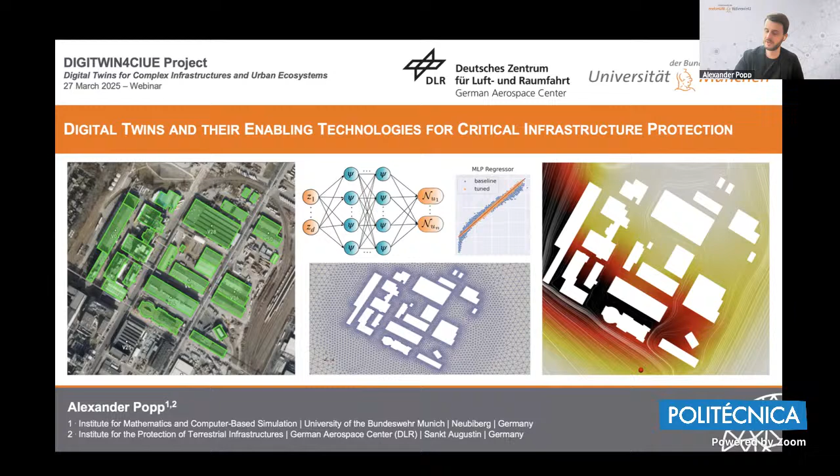Taking it from there, in recent years I built up a second focus of my research, which was revolving around digital twins. The application case that emerged from this is basically infrastructure modeling and infrastructure monitoring. So this is where our two fields of research interest basically met recently, and I'm happy to be here and talk a little bit today about our activities. I hope you will find this interesting.

Since I'm maybe new to most of you, I'm going to do a very quick introduction beyond what has just been said. So who are we and who do I represent? On one side, as part of the university, we've built up in recent years a research project called RISK.twin. You can already see from this acronym that RISK refers to risk associated with the treatment of infrastructures, and twin refers to the digital twin as the central research theme we've chosen.

So the deal basically is that we do the fundamental research within our groups at the university. We have expertise there in the civil engineering department for several sectors of infrastructure, right? Transport infrastructure, but then also in the building industry and everything related to the energy sector, water sector - all the classical sectors of critical infrastructure with the domain knowledge. And then we have these integrative parts such as simulation, model order reduction, scientific machine learning that try to condense this domain knowledge into tools useful in engineering practice.

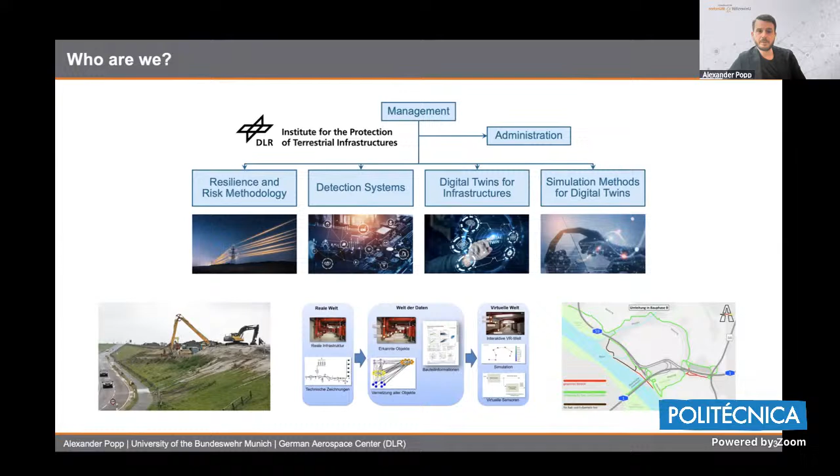Now let's start more with the topic of the talk. Probably to this audience, I don't have to motivate too much that critical infrastructures are omnipresent and that their protection is of utmost importance for stable operation of all the critical services in society, and basically all the way to national and European security.

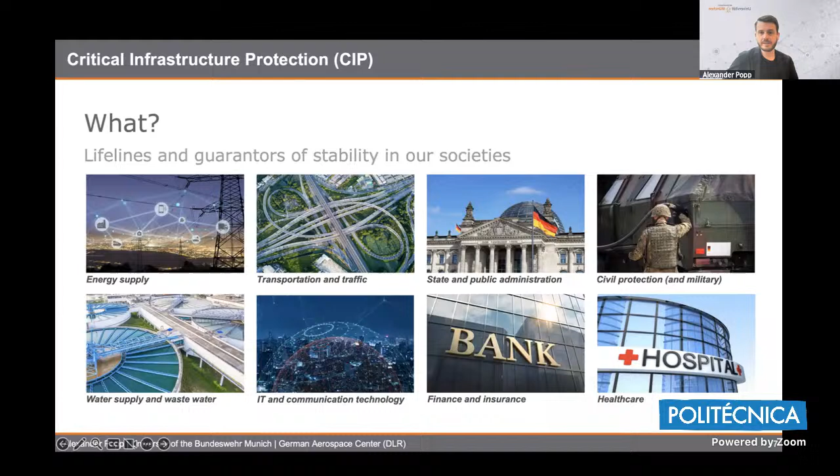The natural question that arises if we talk about protection of infrastructure is: protection against what? The answer to this question is extremely broad, showcasing the complexity and diversity of this research field.

At the end of the day, and this is a common misconception, if you want to protect a certain infrastructure - let's think about a nuclear power plant somewhere in France - there won't be one magic digital twin model in someone's computer that you just run and that will automatically safeguard and give you information about all possible scenarios and threats.

Because the threats are just so diverse, I advocate that we first do a threat and risk analysis, analyzing what types of dangers and threats we want to focus on. Then we need to develop and modularize problem-specific monitoring tools, a problem-specific digital twin that can answer relevant questions in that field.

A classical threat scenario that's sometimes forgotten these days, which I showed with the bridge collapsing in Dresden, is technical failure and lifetime issues. I think this is by far the largest and most important issue among all the threats and dangers posed to our critical infrastructure.

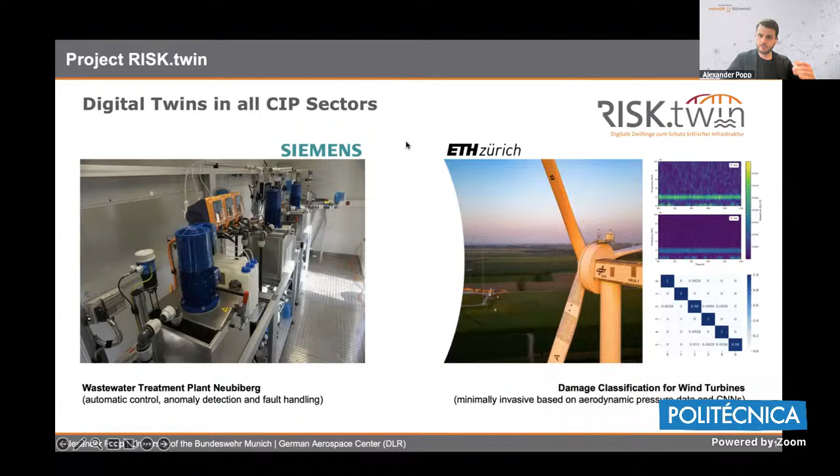So what we do is work with people from ETH Zurich—they also have a spin-off company—where they developed basically a sock or sleeve that you pull over parts of the wind turbine blade that does aerodynamic pressure measurement. We don't measure anything for the structural mechanics; we only measure the aerodynamic pressure distribution around the airfoil, around the profile of the blade. Then we apply machine learning techniques to do damage classification based on the aerodynamic pressure measurement. We've shown in a preliminary study, published recently, that you can get information on potential structural damage—cracks that happen, for example, close to the root of the blade—solely based on those aerodynamic pressure measurements, which would be very nice if we can translate this into practice.

All right, so some more theoretical words on what a digital twin is for us and how we deal with this. I know this is really dangerous—going into the discussion of what is a digital twin can lead to hours and hours of discussion. I'm happy that we don't have direct feedback right now, but you can ask me later about it. So I don't want to go into the full discussion. I'm just going to show a minimal definition that I think we can all hopefully agree on.

For me, a digital twin is a platform of models that consists of a physical asset—so we have the real infrastructure—its digital counterpart, whatever that might be, with some bidirectional coupling. So we have the real infrastructure, we have some digital model or digital representation, which can also just be a data model, and we have coupling between those two.

And this coupling needs to be bidirectional. So I think this qualifies as a digital twin. There's also recently been in the US this National Academies report led by Karen Willcox and others, so I think it's very close to a minimal definition of this.

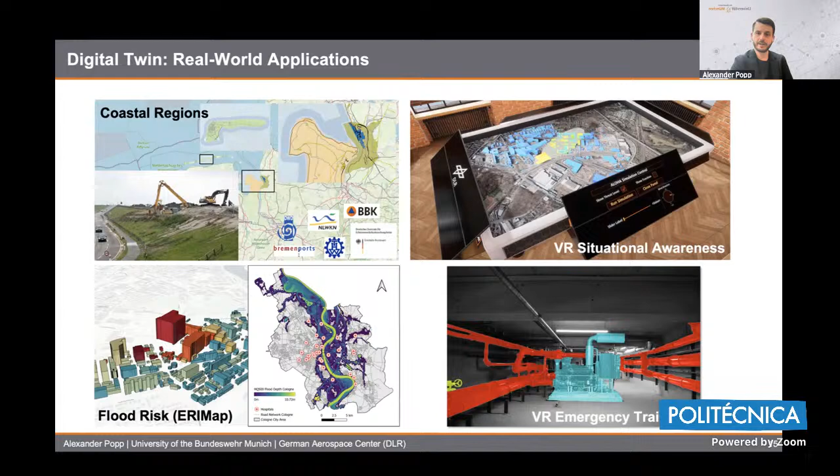On the lower right, you can see something like a virtual reality environment - in this case, for training of emergency services, emergency fighters. An obvious problem is that firefighters, for good reasons, cannot practice their critical crisis scenarios too often, because luckily there's not a fire very regularly, or not something going on very regularly. So one field of research we are going into is setting up VR environments for training of emergency services, where they can do some virtual training. The picture on the top right I will show later on.

I'm going to mention this very quickly and focus on the second use case - one use case we are dealing with quite a lot, but that goes really deep into civil engineering, so maybe it's a bit too specialized for you - is bridge monitoring. I just want to show some highlights from our projects there.

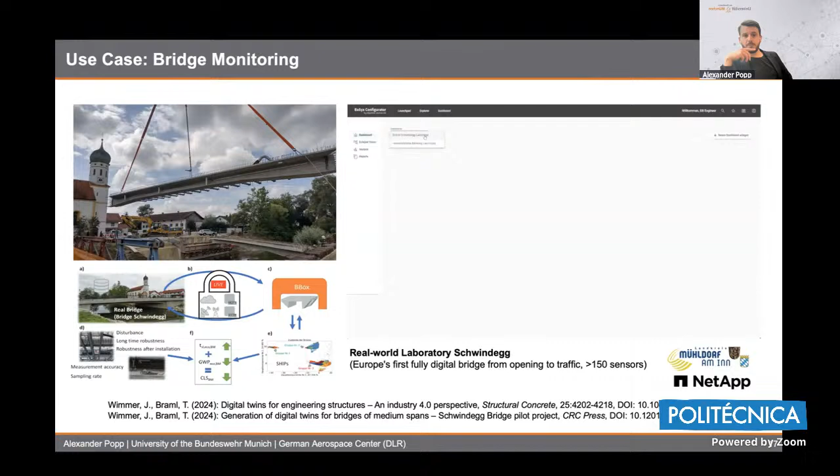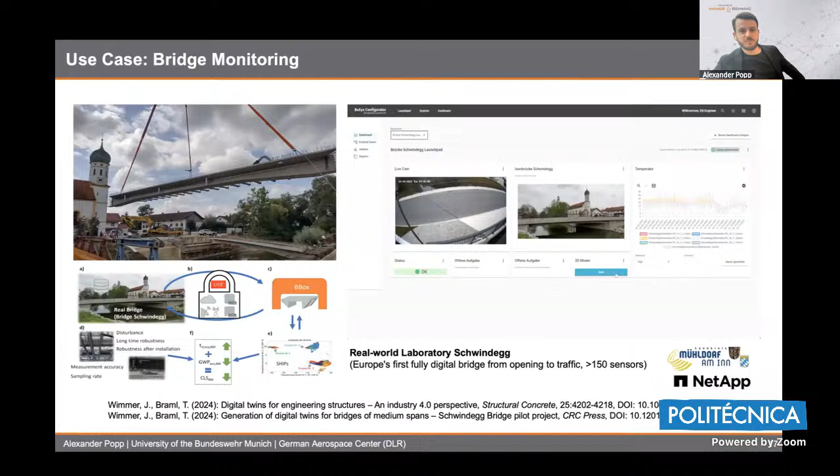From this RISK.twin project, we were very lucky and very happy that we could actually build up what we call a real world laboratory. So what is a real world laboratory? You can see on the top left - this is a really nice, typical small village in the south of Germany. Due to some personal connections, we were able to partner with them.

They built a new bridge on the main road going through that village, which is not too far from Munich. And we partnered up with them, and we could integrate everything we could ever wish for having a full-scale infrastructure monitoring. So basically, we installed this bridge with over 150 sensor systems, including really state-of-the-art fiber optical sensors that go along the reinforcement bars.

So now, since a bit more than one year, when this bridge was opened, we have a flow of real-time data coming into our servers, and we can use this, as I said earlier on, as a real life use case for developing our methods.

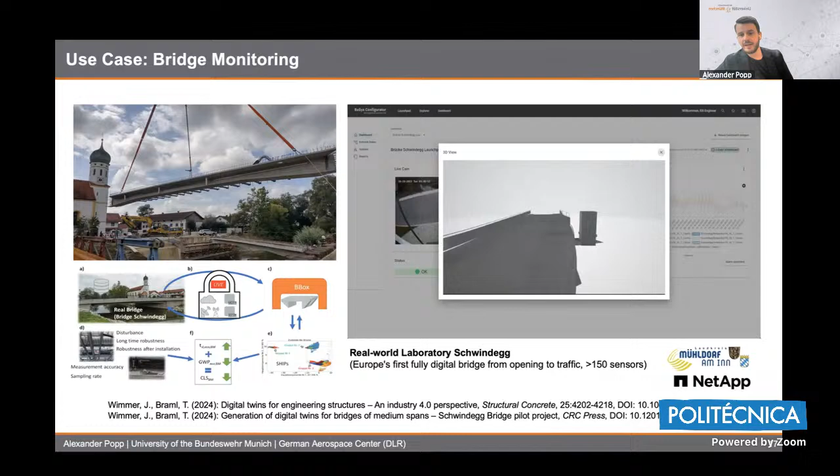And we are quite proud about this because you always have to be careful if you say you're the first in doing something, but we double checked. So this is, at least in Europe, the first fully digital bridge right from the opening to traffic. Meaning that it's a new bridge, and from day one we have all the data, which is very critical and important, right? Because often you have bridges that have already been around for some time, but here, right from the construction phase, we have all the data that we need. So this is also now for us some kind of test bed for developing further our methods.

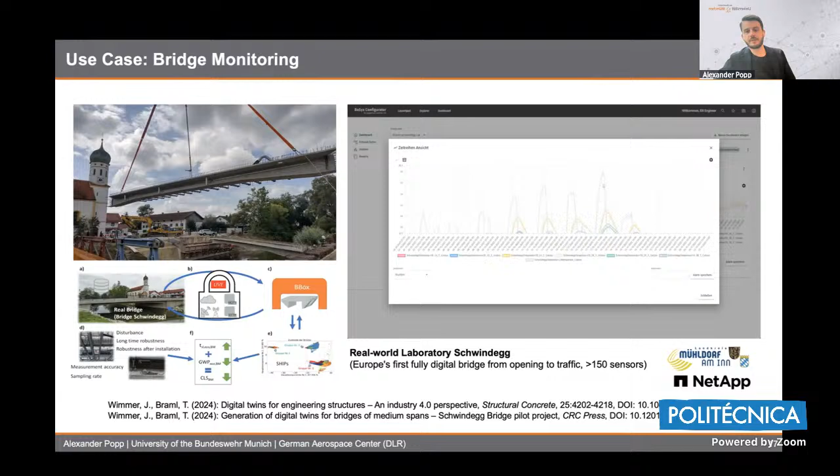Okay, and this is all connected to this, so I'm just going to jump over this. And I'm going to use the remaining time to focus on one use case that maybe is not the most obvious use case if we talk about critical infrastructure, but it's related to that. And I like that use case very much, actually, because it showcases very nicely what we can do with digital twins. And it has turned out to be very relevant, and we have many partners already for parts of this research, both on the emergency service level, but also on the critical infrastructure operator level.

So the use case is a chemical accident. We came up with that use case basically with an industry partner that we have: a large German company, Henkel. I don't know how well known this is outside of Germany, but it's one of the largest chemical companies in Germany, and they operate one of the largest industrial facilities, where they produce chemical base substances, very close to the city of Düsseldorf. Düsseldorf is a major city in Germany with around 500,000 or 600,000 inhabitants, and this company has been around for a while.

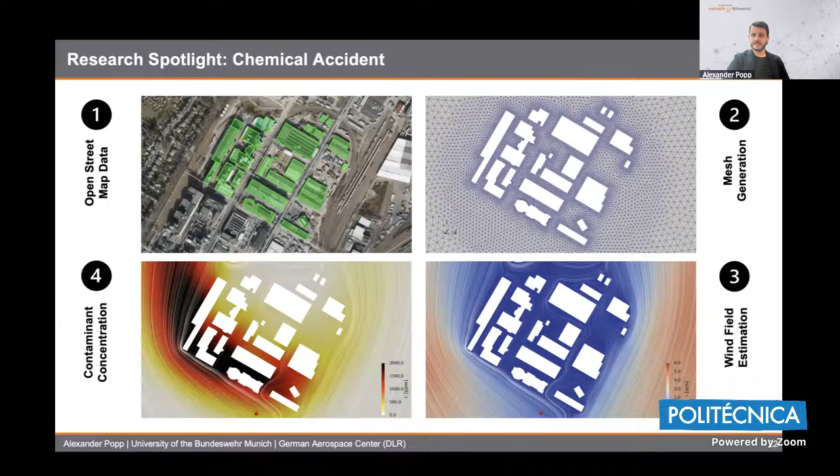So anyway, in short, the company and of course we from a research perspective are interested in what's going to happen in the case of a chemical accident. The problem that you have—here you can see just some snapshot images—is that you don't know. So how will you actually learn about this chemical accident? Well, you will have some sensor systems deployed somewhere on your ground, somewhere along this big chemical plant, which stretches over more than a square kilometer in this case. And so the question really is: at some point, some sensor will be triggered and tell you there's some hazardous gas flying around in a certain concentration. So you don't even know in the first place where the gas has been coming from.

In terms of doing simulations or what a digital twin can tell you, you're interested in what we call a forward problem in mechanics. Where is the hazardous substance transported? That's what we want to know, and we want to know this fast, because this might be very important to tell people to evacuate, because they shouldn't stay there.

But the problem is that typically we don't even know, or we cannot model this forward problem appropriately, because for this, you would need to know the initial conditions. You would need to know where did this hazardous substance come from, where did it start and when, and then we can do a forward simulation.

Instead, what we have to focus on in these cases is that we have to solve so-called inverse problems. If you're in mathematical modeling, you know about inverse problems. First of all, we need to identify where is the source - we have to do source identification. Where has the substance actually emerged from?

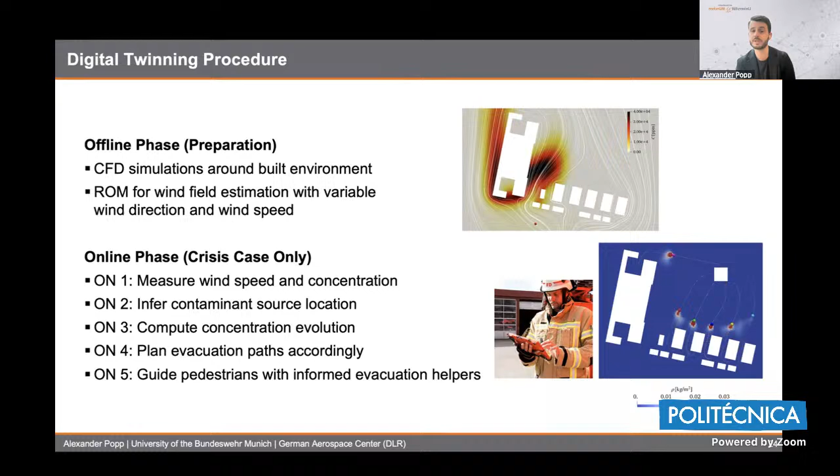We go step by step through this process. First we compute where the source location actually is. Then with this reduced order model we can compute the forward problem, where this gas is transported. We can plan evacuation routes, and as shown with this firefighter scenario on the iPad, we can forward this information to emergency services to guide people towards safe areas. This must also be done for 3D problems with complex built environments, and for city scale simulation this becomes very computationally heavy. So the offline phase needs to be planned very well, which I won't address too much today.

Sorry to cut you, Alexander, it's already getting late. If you could accelerate a little, that would help, so we still have time for questions. Almost done, almost done.

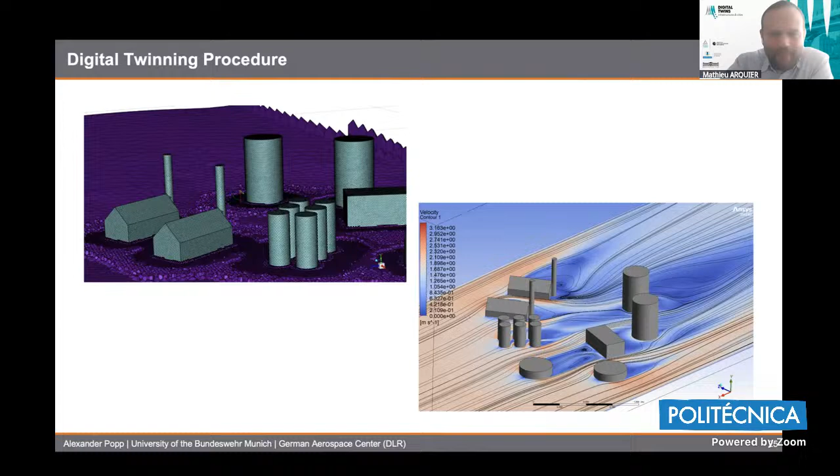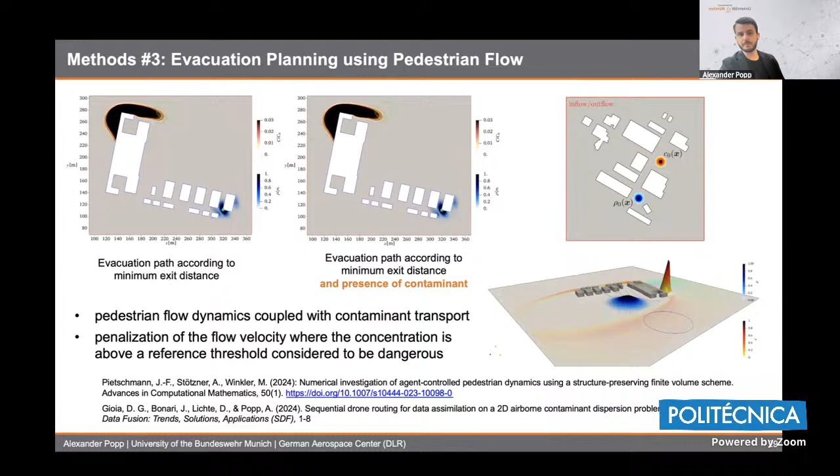Also for the forward problem simulation, I'll skip this. This last thing I'll show demonstrates how we integrate all of this into technology at the end of the day. We call this a situational awareness table, a virtual reality application that we invented.

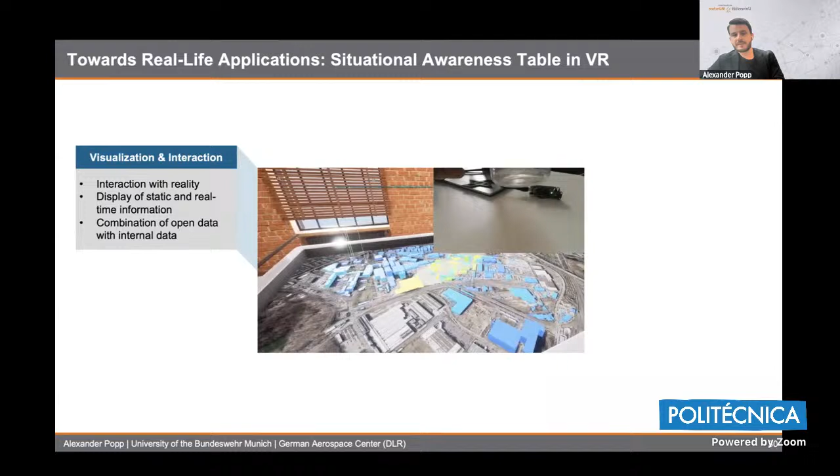In this virtual reality environment you can see the built environment, in this case a chemical plant. Here you can really do everything I talked about, the forward simulations and inverse problems, in a crisis scenario in real time on this VR table.

Why VR? Because often crisis teams cannot be assembled fast enough, since these people are sitting in their offices, so they need to meet online in a virtual room as the fastest possible way. They can have an online crisis meeting, run some what-if scenarios, and check where to deploy firefighters, where to evacuate, making those decisions in real time assisted by those digital twins.

So, sorry for taking a bit too much of your time, but I hope I gave an overview of what we're trying to do here. I'd be very happy to continue these discussions with whoever is interested, and thank you very much for your attention, happy to interact more.

Thank you, thanks a lot, sorry again to rush you, Alexander. Just a quick question, can you provide us the PowerPoint? Yes, I can, I will have a quick check, and I might have to remove 2 or 3 images for confidentiality reasons, but apart from that it's going to be just fine.

Yes, thank you, sure. If anyone has any question, please either unmute yourself or type in the chat. So is there any question? Maybe I will start with the first one. As you mentioned, you are dealing with risk and critical infrastructure.